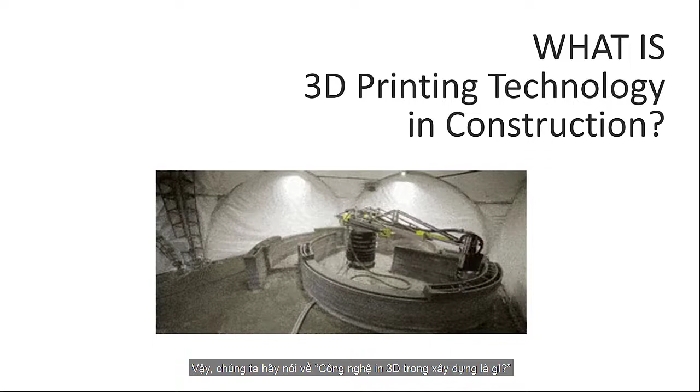So now let's talk about what is 3D printing technology in construction. There are two types. The first one is 3D concrete printing, in short 3D CP. Here they use rails and install a rig around the building ground as a structure to direct the robotic arm, which moves back and forth to extrude the concrete layer by layer. In this case they use concrete as the base material.

However, the concrete used here is not the normal concrete we use on construction sites, because if we use normal concrete, it takes a very long time to settle. The settling time is very long. In 3D printing, you print the material layer by layer, so after one layer is done, if you use normal concrete for the next layer, the layer below cannot withstand the strength of the upper layer, and the structure may fall. That's why in 3D printing technology they use concrete with a quick-setting property.

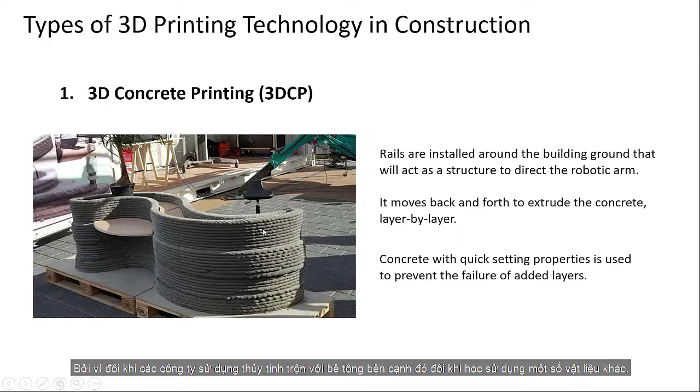The concrete ratio, or the mixing ratio, depends on the company. There's no standard for now, because sometimes the company uses glass mixed with the concrete, and sometimes they use other things. So it's very different - there's no standard yet. The second one is metal 3D printing.

This one is used to print metal material. This is developed by the Dutch company MX3D. This company wanted to construct a metal bridge, so they made a new construction method called WAAM to print the 3D metal structure.

Here they use a robot equipped with a welder and nozzle to weld and print layer by layer, printing the metal. The material used here is not limited - you can use not only stainless steel, but also bronze or aluminum. I will talk about the case studies of these two types of 3D printing technology later.

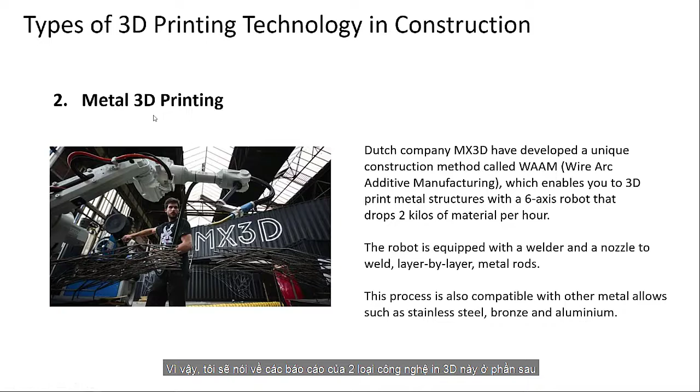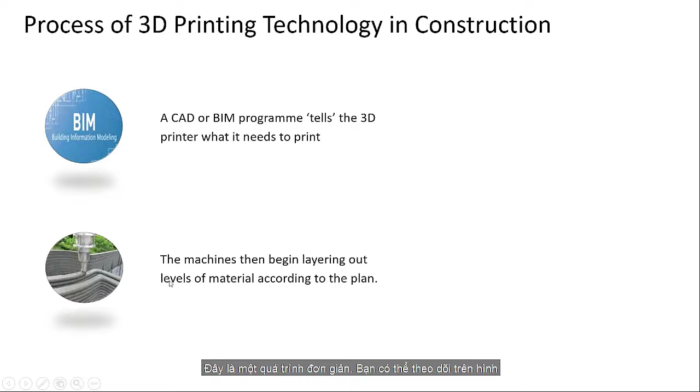Now let's talk about the process of 3D printing technology. First, to do 3D printing, you have to have a computer-aided design or maybe a BIM program. This CAD or BIM program tells the 3D printer what needs to be printed - you import the design to the 3D printer, and then the printer prints the material layer by layer according to your design or plan. It's very simple, the process, if you look at this.

This is the comparison between conventional and 3D printing construction. In the conventional method, you see the material, then you mix it in a concrete mixer, and build block by block - you have to use labors, equipment and material. It's very time consuming, and later you get the house, but you also have a lot of wasted material in this process.

However, in 3D printing construction, you put the material into the 3D printer, and the 3D printer substitutes for all of this process - you put the material into the printer, and then you get a house. This process reduces a lot of waste, and you could achieve zero waste material in 3D printing. This is very friendly to the environment, and you can also save on wasted material cost.

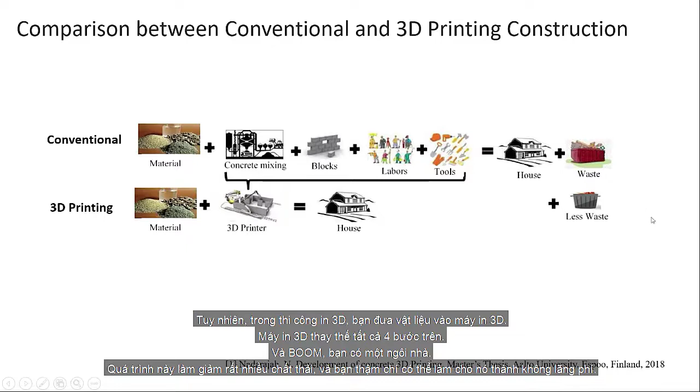So now let's talk about the important milestones of 3D printing in construction.

So the first one in 2006. This is the very first time 3D printing technology is introduced into construction. Dr. Behrokh Khoshnevis of the University of Southern California in USA attempted to make a wall in 3D printing. So this is the very first entry to the construction industry.

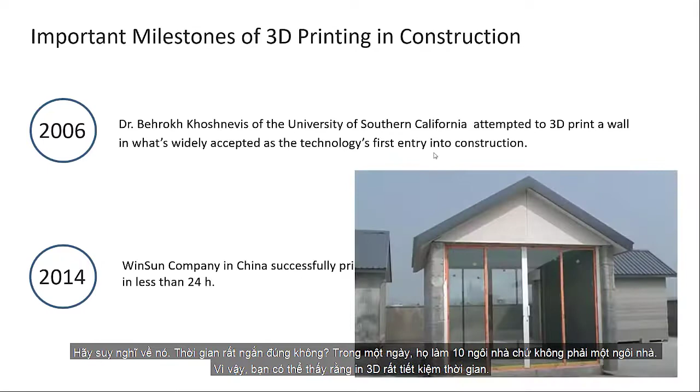Then later in 2014, one interesting thing is the Chinese company WinSun constructed 10 houses in 3D printing, and the construction time is less than 24 hours. Think about it, it's very short, right? In one day they made not one house, but 10 houses. So you could see 3D printing is very time saving. This is the picture of the house they constructed. You can see the layers here.

So now let's talk about the case study project for 3D concrete printing, 3D CP in short. I will click the video here. This is the latest 3D printing in Dubai, and here you can see the building, the largest 3D printed building in Dubai. It's 9.5 meters tall and it's a two-story building. You can see here, and the square meter is 640 square meters.

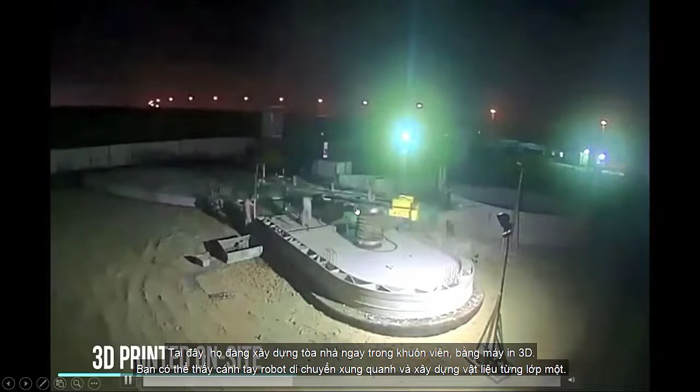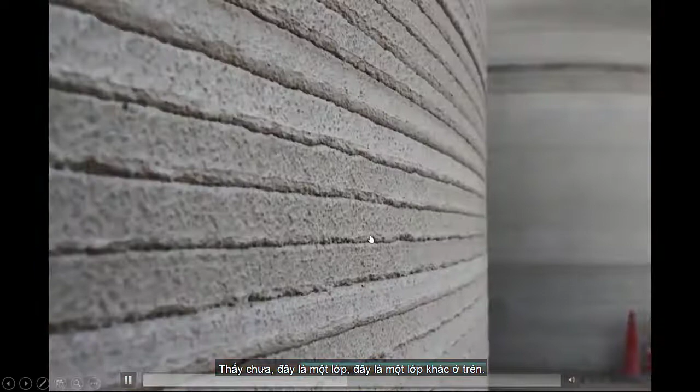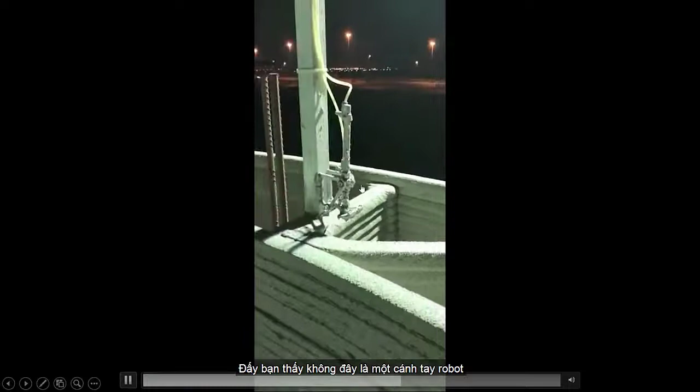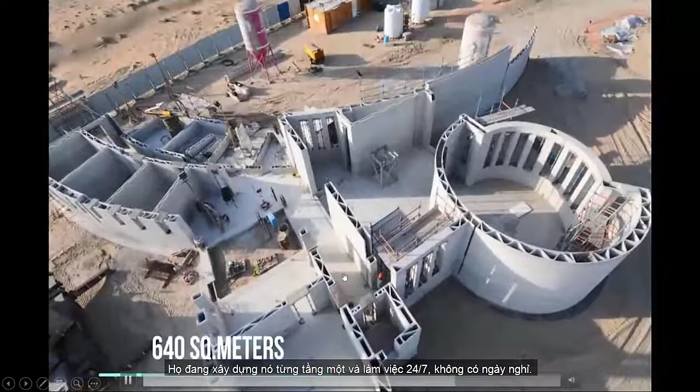They are building the building on site with the 3D printed machine, with a robotic hand here. You can see they are building the materials layer by layer here. See, this is one layer and this is another layer here. With the robotic arm, they are building them floor by floor and working 24/7 with no holiday.

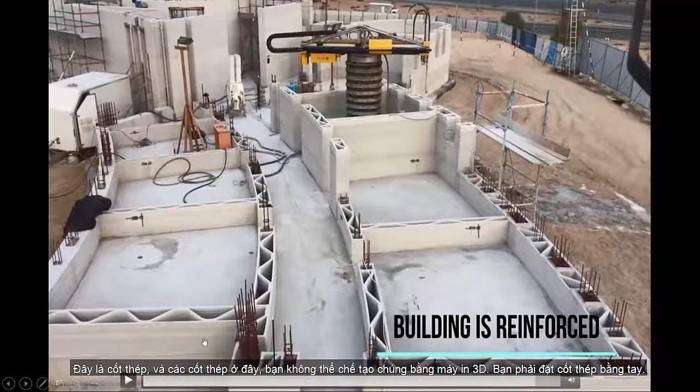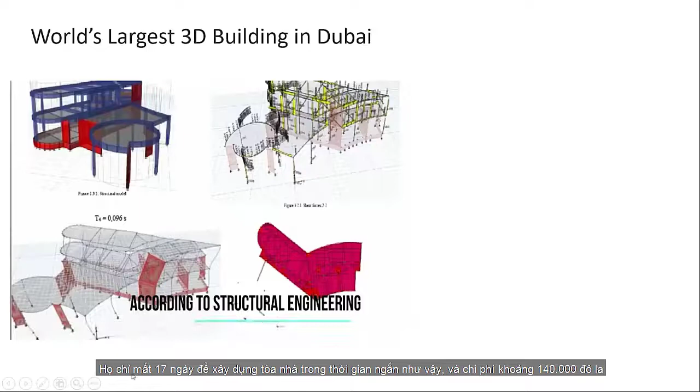It is built by Apis Cor machine. This is the thing here. Yeah, this is the rebar here. You cannot place the rebar with the 3D machine, so you have to do it manually. This was constructed in 2016, a 3D printed material building in Dubai, and it only took about 17 days to construct. Very short, right? And the cost is around 140,000 US dollars.

Now let's talk about it. This building is not entirely 100% 3D printed on site. Only the walls and the columns are 3D printed. Other things like the foundation use the conventional method. Also for the columns, as you saw before, the reinforcement bars are placed manually. It's not possible to do that in 3D printing for now, and the concreting is also done manually. For the slab, it's precast, prefabricated in the factory first and then transported to the site later. For the roof, ceiling, windows, insulation, plumbing, and electrical installation, they are all done by the conventional method, not 3D printing.

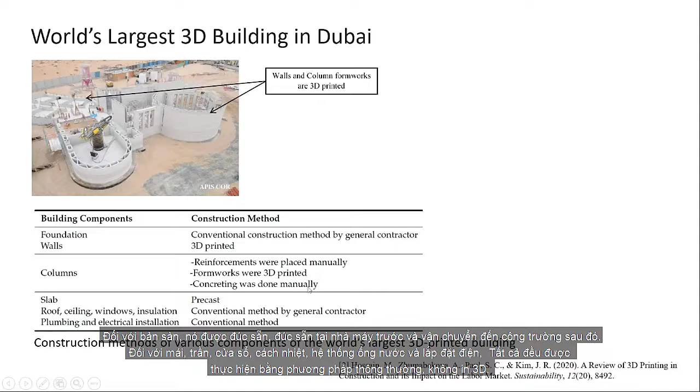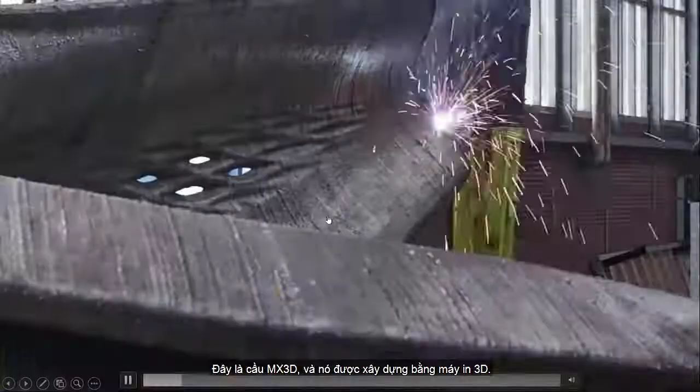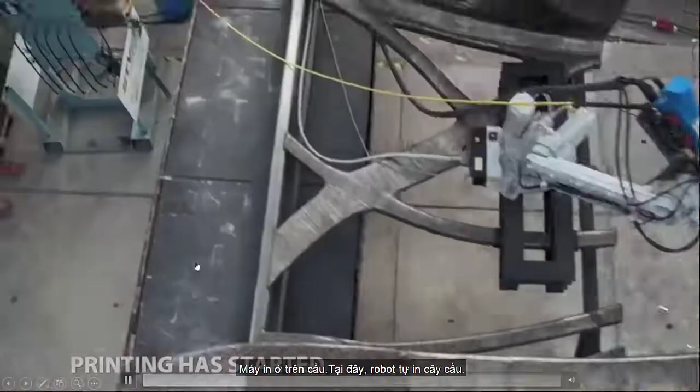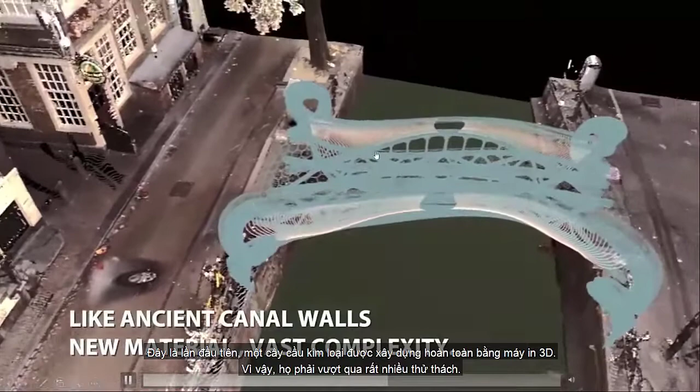So next, this is for 3D metal printing. This is the case study here. This is the MX3D bridge printed with a 3D printer, and instead of concrete, they are printing steel materials. They printed it here, see, the printer is on the bridge. Here they print the bridge by themselves. And yeah, it's very difficult, so they had to develop a very separate design and concept, and also different materials. It's the very first time they were building a bridge with a 3D printer. They had to overcome many challenges.

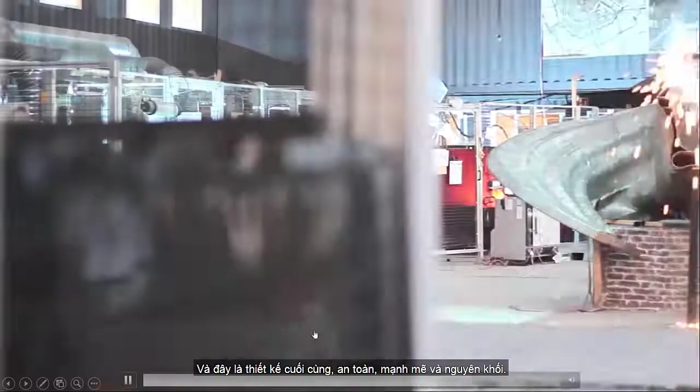And then finally, this is the final design here. It stays safe, strong, and also organic. This is the MX3D bridge in Amsterdam, Netherlands. The conceptual design was done in 2015, with testing and changing to the optimized design, testing the material, developing the software, and also developing the robot. Finally, the project was done in 2018. They used 4.5 tons of stainless steel, and the bridge is 12.5 meters long.

One interesting thing is they constructed a digital twin of this bridge in the virtual world, and in the real world bridge they put sensors to track the performance of the bridge. So for example, when one person moves across this bridge, the sensor tracks the performance of the bridge and updates it in real time to the virtual world digital twin. So you could see very spontaneously the performance of the bridge, and you can see very clearly what is wrong with this bridge and what we need to fix. Yeah, it's very useful and a very innovative idea.

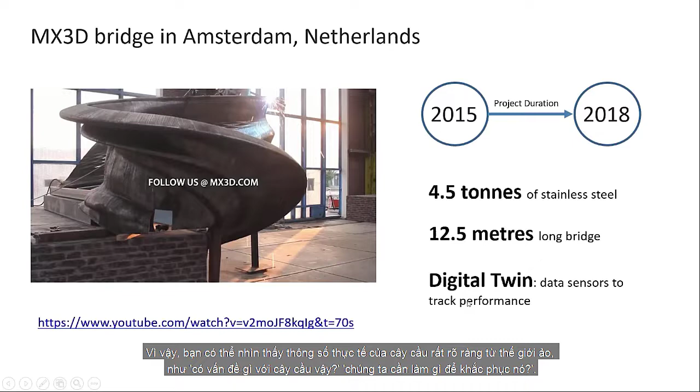The challenges we have to face: the first one is cost of research and development. With 3D printing technology, you need a 3D printer, and the initial investment is very huge, very expensive. Most building firms operate on very thin profit margins, so they are very hesitant to use 3D printing in construction. This is the hurdle 3D printing technology has to pass.

The other thing is perception and tradition. Most people are attached to buildings made with brick. When you hear the word house or home, you usually think of a place built with brick, concrete, rebar, or steel. In 3D printing, all of this is done by layering. So when you think of a 3D printed house, you feel like this is not a real house, this is a toy house, you don't feel safe living here. This is one thing people have to change.

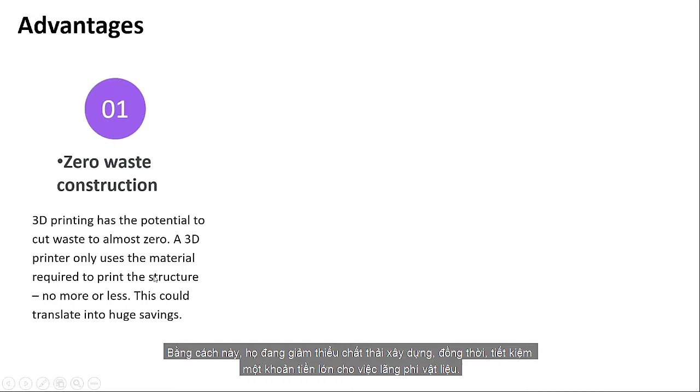The advantage is, of course, zero-waste construction. 3D printing only uses the material it needs, so it reduces construction waste. This also means you are saving a huge amount of money. The other thing is time and cost reduction.

With 3D printing, it's a robot, and also with AI in construction, they work 24/7 - there's no holiday for them. According to estimates by the Dubai government, 3D printing can reduce labor by 70%. This way, they reduce cost by 90%, and also reduce time by 80%. Very time-saving, 3D printing is.

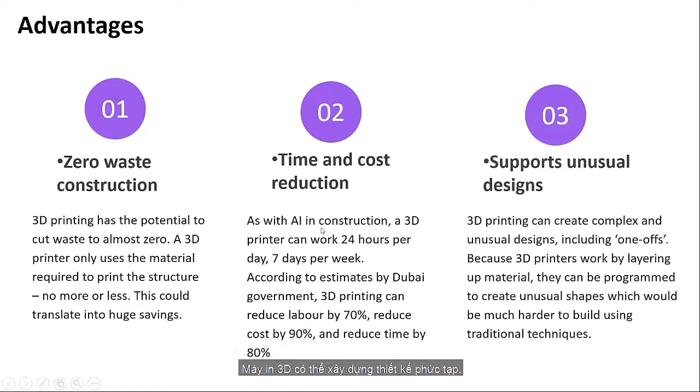Also, they support unusual designs because 3D printing is done by layering the material. They can do complex and unusual designs that are impossible to construct in conventional construction. This is a huge advantage.

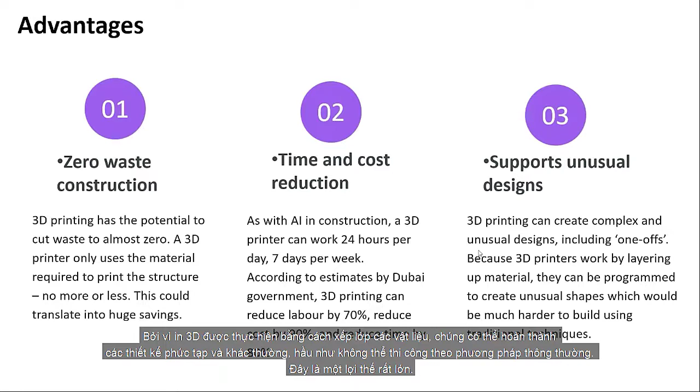So now, what is the future of 3D printing in construction? Let's talk about the first one: by 2030, the Dubai government set a target to construct 25% of its buildings using 3D concrete printing. The driving force behind this is because construction in Dubai is hugely dependent on immigrant workers - 90% of construction workers are immigrants. So the Dubai government wants to reduce labor usage, that's why they are doing 3D printing construction in the construction industry.

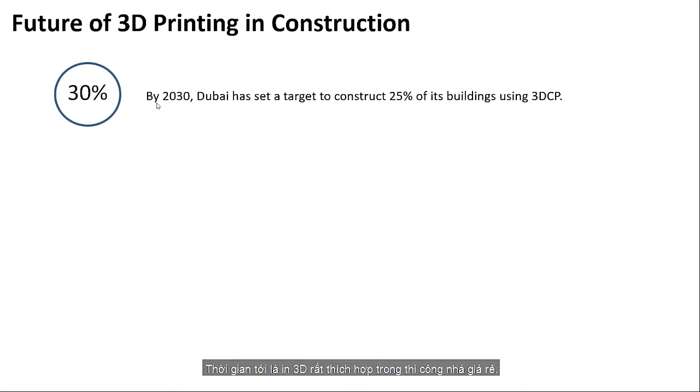Also, in this way they can reduce construction waste and protect the environment. The next thing is that 3D printed houses are very suitable, very affordable. In Tabasco, Mexico, 50 affordable houses are planned to be constructed using 3D printing. Also, for 3D metal printing, they can be used in construction for highly optimized structural forms, and they can also combine with traditional structural sections to make a hybrid structure. This is the future for 3D printing in construction.

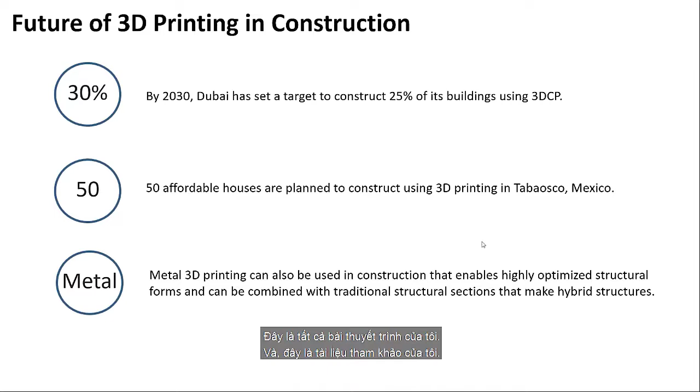And yes, this is all of my presentation, and this is the reference. And this is all. Thank you.